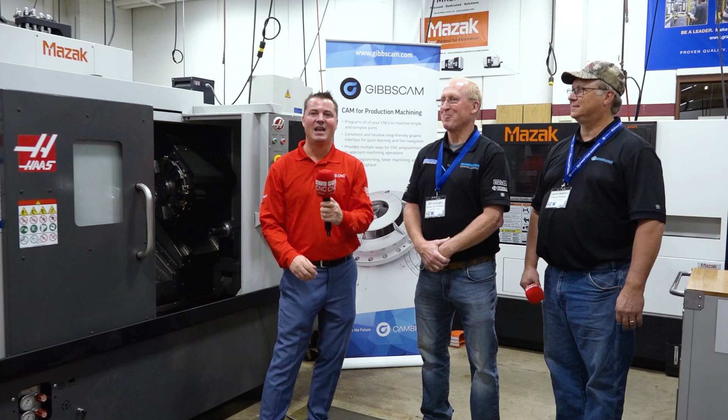168, man. I almost want to sing the song, but I'm not allowed. I think there's some rights to that. I wouldn't be able to play this video, but you know what song I'm singing in my head, and you are now as well.

168 Manufacturing. We're going to talk about what they do, what they make, and why GibbsCAM is so important to all the different projects they have going on. So we'll start with you, Jim. 168 Manufacturing first, because I'm curious - why is that the name? How did you come up with that name?

I ended up changing the way we look at our business. I found out, as an accountant - that's my background - that I'm paying for 168 hours a week, which is 7 times 24. So because I pay for that, I thought, why don't we try to utilize 168 hours of manufacturing a week? So that's what we've done. We utilize every hour of the week.

Has Darren ever told you that you're a clever man? Has he said that to you before, Jim? Maybe in a different way. I like that. I do really like that name, and now I get it. Super cool. Let's all try and get to that point.

Let's talk about what you make and how you try to get to that point of working 168 hours in a week. So let's talk about some of the parts you make along the way. When we started, we were predominantly working with wholesale optical laboratories that make prescription eyewear. We had to start making more and more parts. Because of that growth, I had to figure out how we were going to get all this work done. So that's where I started thinking about 168 Manufacturing.

I have that question a lot of times myself when I'm booking all my flights and all my places to film. Now we have to involve - because I'm very curious - we want to bring Darren into this conversation. He is a handsome young man, and he can just stand there on camera and not say a word, but we've certainly brought him here for a reason.

So yeah, we definitely have a lot of communication with each other. We know each other by our first names, and they recognize my voice, I recognize theirs. So you don't even need a caller ID - you just say, hey, it's me, and they know exactly who it is. And the beauty about Midwest Cam and working with Gibbs is when I send an email, they're quick to return it, and sometimes they'll even pick the phone up right away and call.

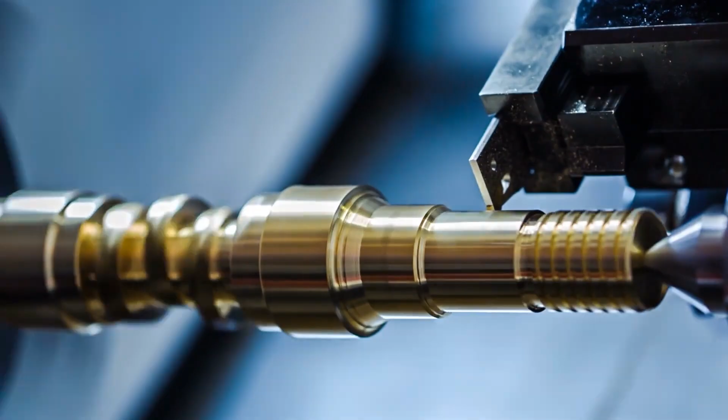But if they can't get to the phone right away, they'll email me and say, we'll get to you in just a short time. We're in the middle of something, but we'll get right back to you on this. So there's a really quick turnaround on my questions.

Darren, have they ever called you ahead of time just to ask how can we help you today? No, I think they just got me on call, or I got them on speed dial. So they just expect when they come in the morning that there's going to be a message from me, and there normally is.

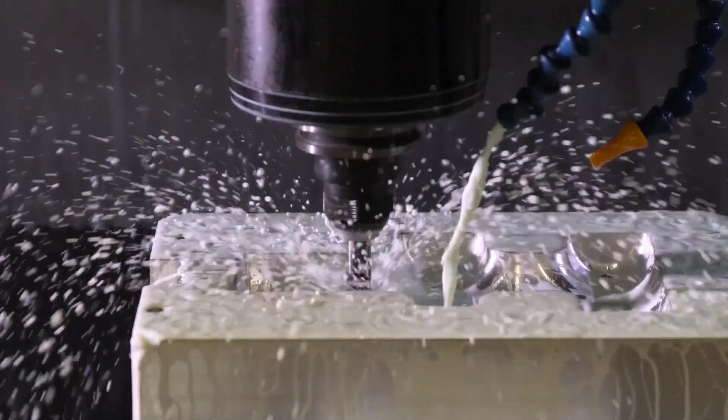All right, I'm going to bring this back over to you, Jim, because Darren just said something to me, and you might make me drop my microphone out of excitement. I'm not sure yet, but he said, I'm all the time learning.

I'm all the time learning something new, learning about this software, diving in more, because every project is unique to itself. But you just told me 168 stands for automation, running every hour of the week, even to the point where you're taking third shift into first shift, running three shifts a day, running through the weekend, running 24. How are you able to do that if there's so many different projects?

The different projects are because of the different industries we're in. For example, we have 168 Manufacturing, which is coolant automation. That's really been the trick to get us to produce when nobody's in the building. We engineered out cleaning chips, we engineered out adding bar feeds, we engineered out getting parts out of the machine. But the one thing we couldn't do was coolant, so we invented coolant sensing and automation.

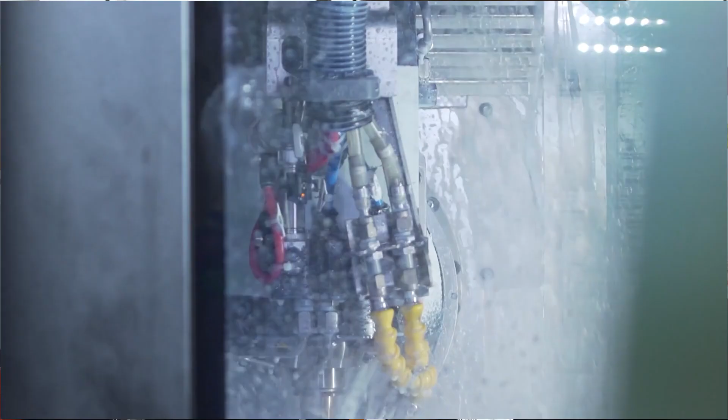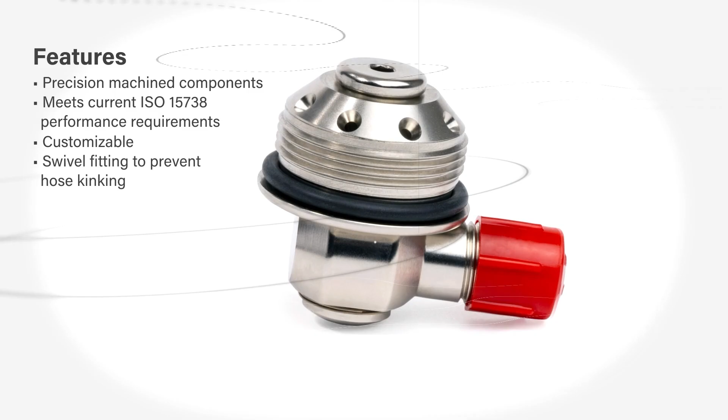Another product line that Darren also deals with is gas inflation products. We don't make life rafts, but our customers do, and that helps us make a lot of parts - low pressure valve parts and high pressure valve parts. So we got a lot of parts.

It sounds like it. Now, this one's for my own curiosity, Darren, it has nothing to do with Midwest Cam Solutions, GibbsCAM, the company itself. Just curiosity, because it sounds like your job is fascinating and new and high-paced, and you're always trying to figure something out. Do you like, when it comes to manufacturing, the creativity side of turning an idea into something tangible?

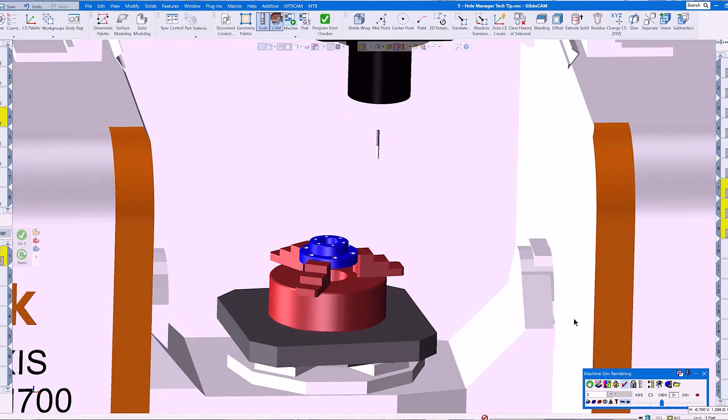Yes, initially every time there's a job that comes through that looks like it's going to be a hair-pulling project, at first you're thinking, oh man, not this again. But then when you get through it, you just look at it like, wow, we did this. We used GibbsCAM, we were able to make the project go through. There's always something that's a challenge to us. There's never a boring minute when you're working in a machine shop, that's for sure.

I see you wearing a hat. You mentioned hair pulling moments. How are we doing? Did we pull it all out yet? It's all good, you're looking good.